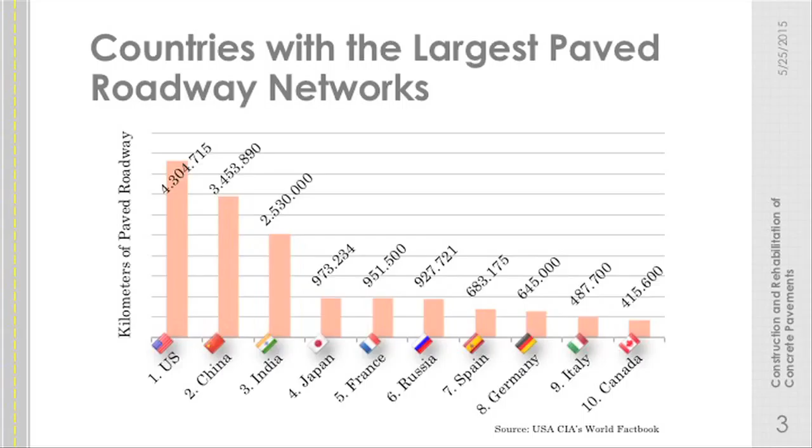My primary references for this presentation, I went directly to the source of the people that sell the equipment, because they take a lot of good pictures for publicity. So we have Wirtgen out of Germany, Gomaco out of Iowa in the United States, and Guntert & Zimmerman out of California in the United States. I've also pulled a fair amount from the internet, and I actually stole some photos from Astrid and other friends that I've made along the way that I didn't reference like Mauricio did, so I feel bad for that. I'll point that one out, though, since she's in the crowd.

Again, we saw this photo earlier. In the US, we have a very large roadway network, and every year we pave on average about 50 million square meters of concrete pavement for roads. That's not everything - that's not industrial and airfields and other spaces. That's roads. We're paving that much.

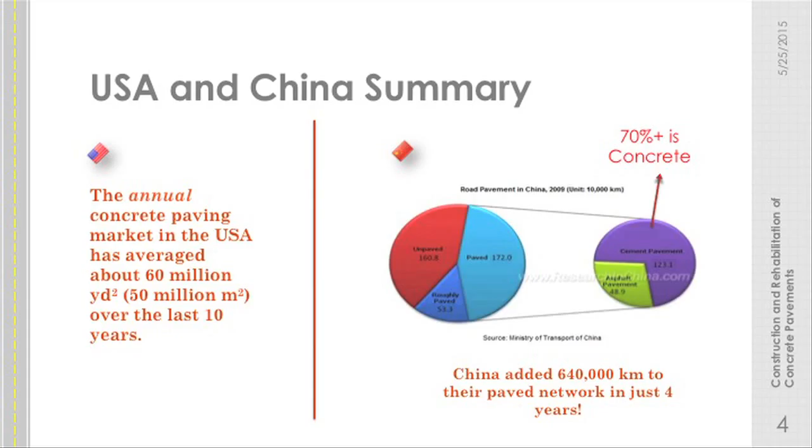Our biggest competitor, if you would call them that, with regards to roadway paving, is probably China. In the matter of 4 years, they added 640,000 lane kilometers of capacity to the roadways. And because they do so much manufacturing, they're moving a lot of raw material, they're building things, and then they're exporting the things that they built to the US and Chile and everyone else around the world.

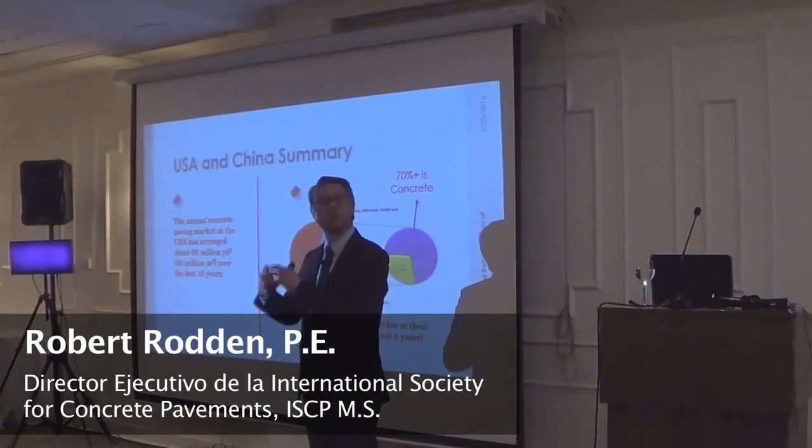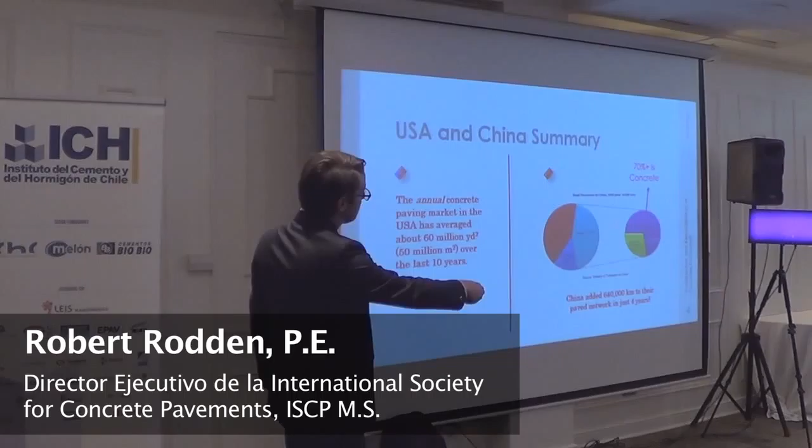They have very high truck traffic loads. In the US, our legal limit on trucks is relatively low compared to the rest of the world. In fact, most of our trucks, unless you're moving something very, very lightweight, drive around half empty. We say they scale out before they cube out - they run out of weight capacity before they fill their volume. In China, that's not the case. They fill the volume to move product, so they have very heavy traffic loads. Because of that, about 70% of their paved roadways are concrete, to fight against that and make serviceable pavements.

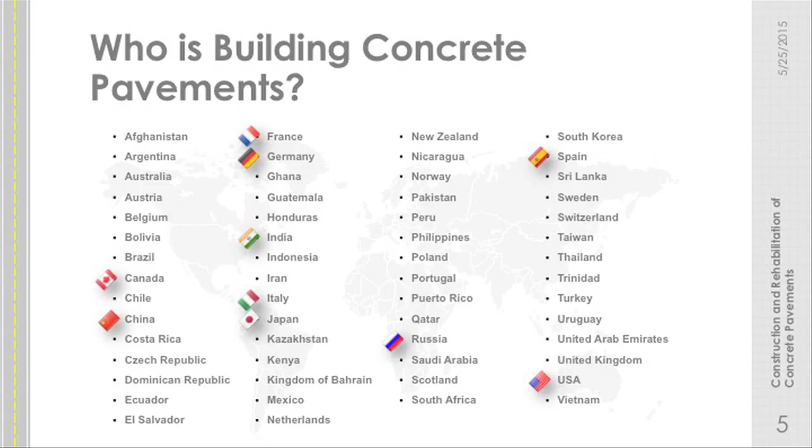So who's building concrete pavements around the world? This is the list of countries that I've worked with or am aware of that build concrete pavements in my decade within the industry. All of those top 10 that we saw are on this list. If you know of any countries that are building or have built that aren't on this list, let me know - I'd like to get them added. But all around the world, people are building concrete pavements.

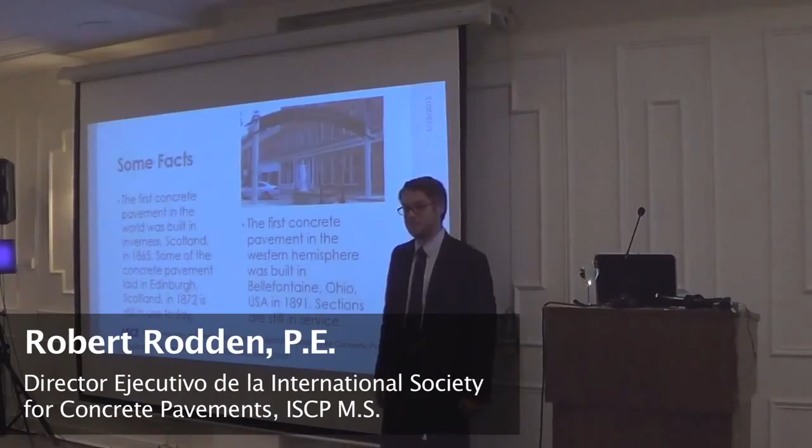The first section of concrete pavement built in the Western Hemisphere was built in Ohio. It's right here, it's still in service today. Built in 1891, it doesn't look great - it's had better days, but Ohio's a very high freeze-thaw state and they use a lot of salt on the roadways.

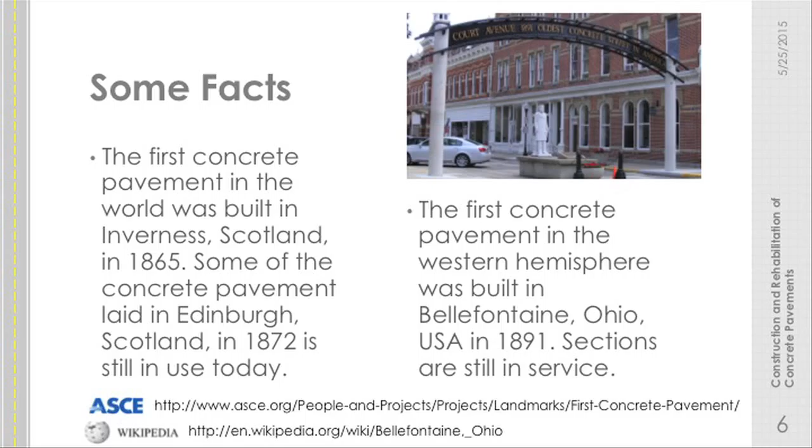There was no structural design in those days - even into the 70s, we were still kind of guessing about things. So in 1891, what they did was said, we have lumber that is this tall, we will make a square out of that. And the square's dimensions, the size of the slabs, was based just on mixer capacity - how much concrete can we make at once? Let's make it that big. That's it - no dowel bars, no tie bars, no logic about anything.

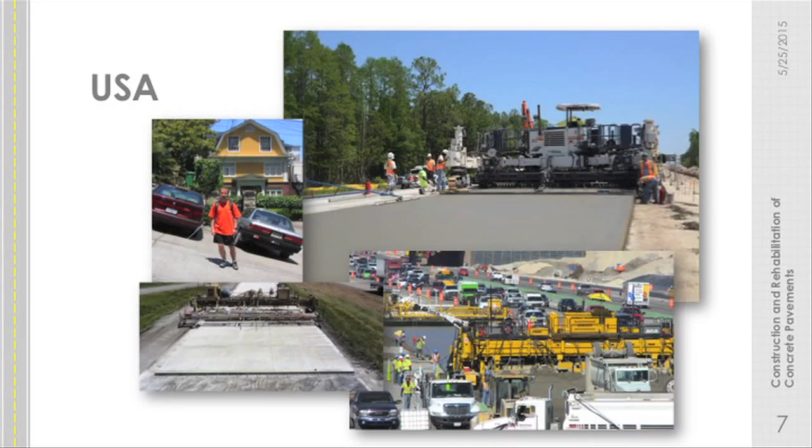Just building concrete squares. The gentleman in that photo, the statue of him, George Bartholomew, had to put a 5-year warranty on that pavement. It's still in service over 100 years later. Is there a product in the world that's been warrantied for 5 years and lasted that long? Can't imagine any other product.

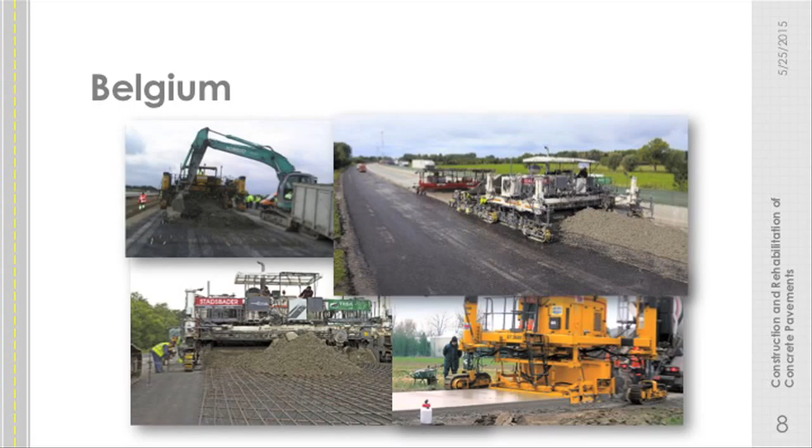So in the USA, as I've said, we build these a lot under heavy traffic, on very steep grades. That's in San Francisco. We do this thin bonded overlay in the bottom left corner - we do a lot of concrete pavement construction.

So now we'll see photos from other countries. Just to try to be brief, I won't dwell too much on them, other than to point out, I guess, more differences. Like here, they're using a loader to move the concrete in front of the paver - we would never see that in the US. I'm not sure what sort of limitation has them doing that, but they're doing that. They have dowel bars, as we use in the US. They also use continuously reinforced concrete pavements.

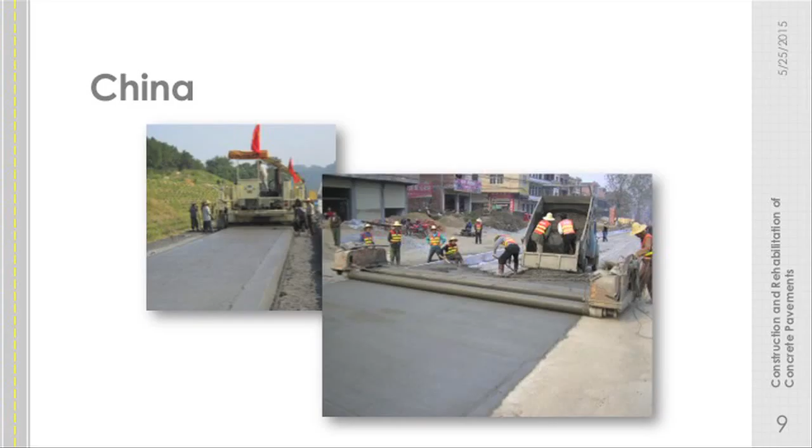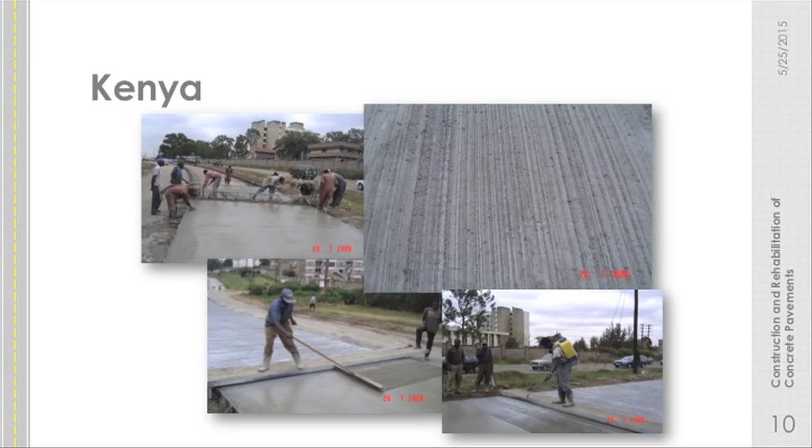In China, they're doing some fixed form paving without dowel bars. It's a double or triple tube screed. They're end-dumping right out of the back of trucks, right in front of the equipment, moving it around, leveling it off.

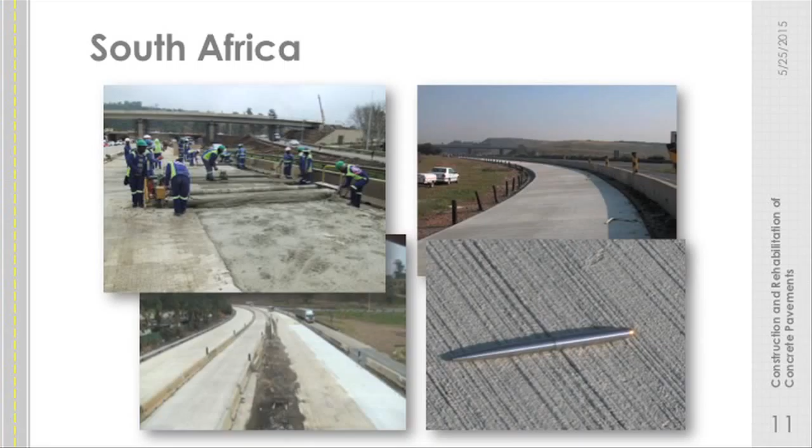Photo from Kenya. They have dowel baskets out there in front of this fixed form paving. They're using a truss screed with a broom texture on the surface - you see that all around the world - and they're hand spraying on the curing compound. They don't have a white pigmented curing compound, but they're still using one.

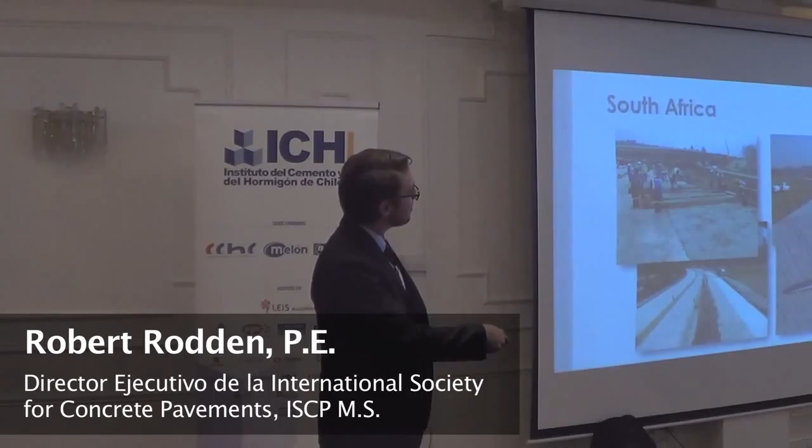South Africa. This is looking a little sloppy for what I'd like to see, but same idea. They're using almost the same piece of equipment they had in China, building very long stretches of concrete pavement in South Africa. Looks like they're also using a broom texture.

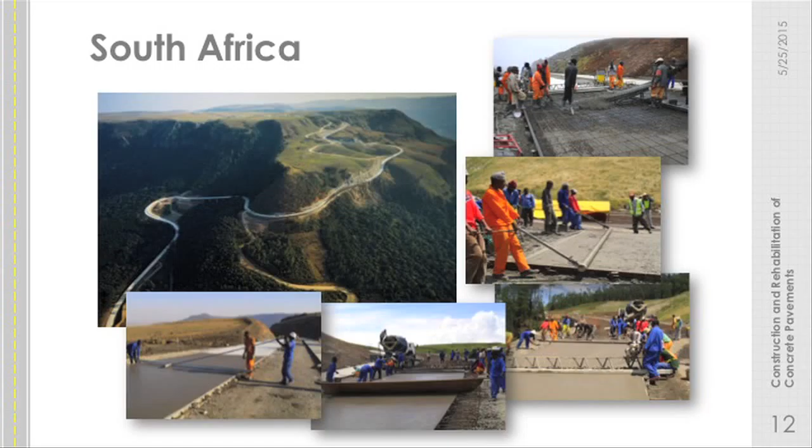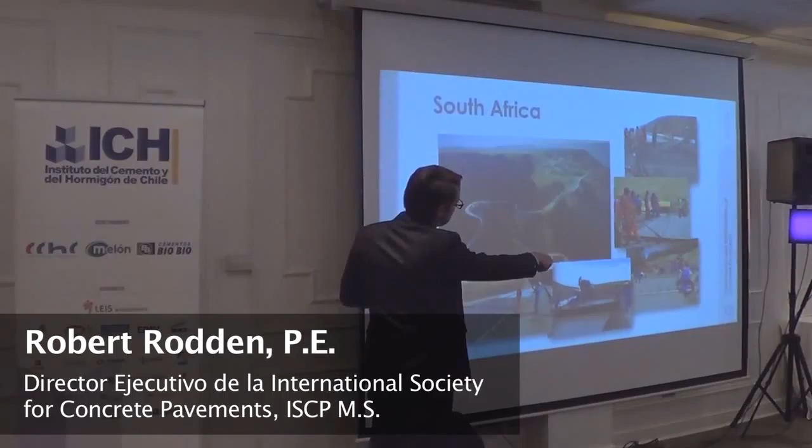Here's one project that I was told was in an eco-sensitive area. The supports for these bridges had to be constructed completely from above, with all equipment and material brought in by helicopter - very expensive. So the roadway wasn't that much of a lift for them to build in concrete, even if the price was more than asphalt. This is a large investment in the bridges there.

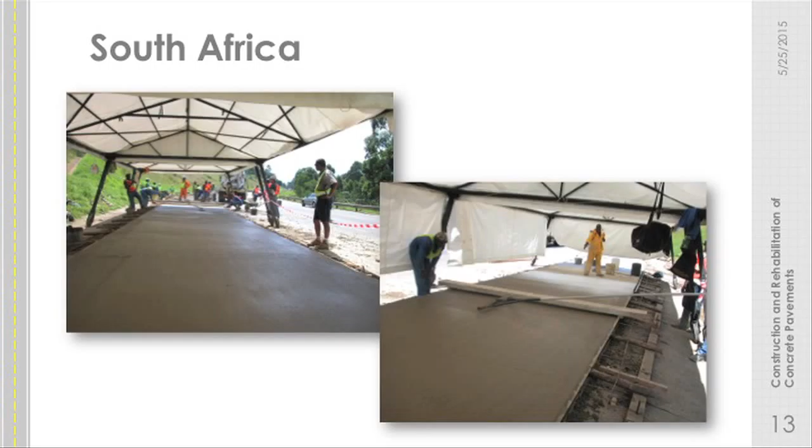So this is up in the mountains, but they're doing the same thing - fixed form, single tube, even up those slopes. They've got a truss screed following that, a burlap drag, finishing, texturing, and curing. Similar to what Mauricio showed earlier, they have tents, especially when up in the mountains where the weather can change. They have sides they can roll down to protect the work from the environment during curing time.

Some more photos from that one project in South Africa in the mountains. They do have a great document.

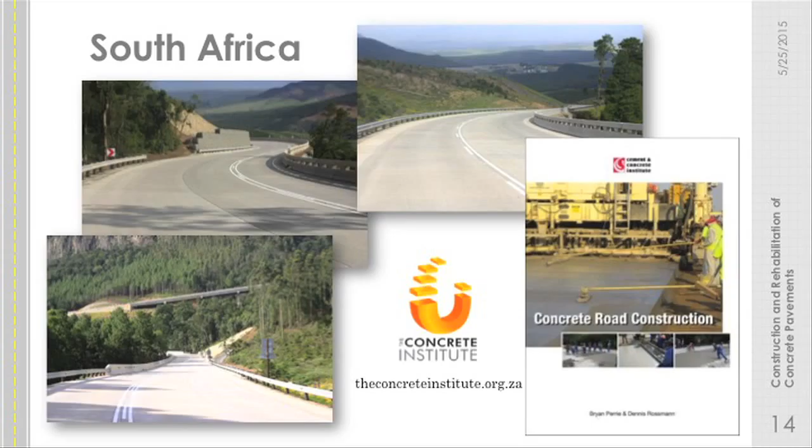Now, in the US, with so much focus on slip form paving, we don't have the best documentation of fixed form operations - I'll admit that. This document from South Africa is an exceptional guide to fixed form paving, because that's their standard. They do slip form paving, but it seems a contractor needs a large enough project to purchase the slip form paver, bring it in, and then sell it off afterwards. But fixed form paving all day - that's what they do.

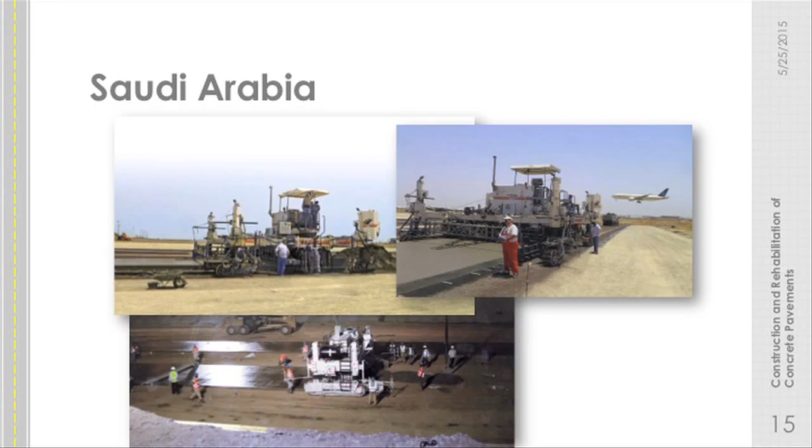Saudi Arabia, large production slip forming projects. At nighttime and during the day, we see the tie bar sticking out of the side. They have an auto float here - I guess we haven't seen that in other photos. That's another add-on piece behind the slip form paver that does the work of the person who otherwise would be using the straight edge. It just glides back and forth across the surface to help close it off more.

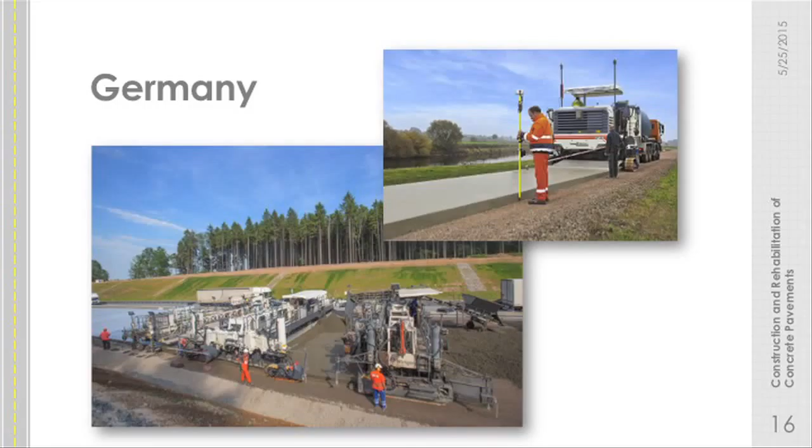Germany, the home of Wirtgen. It's like you get to look at Germany for a second while I figure out why it is we've stopped advancing again.

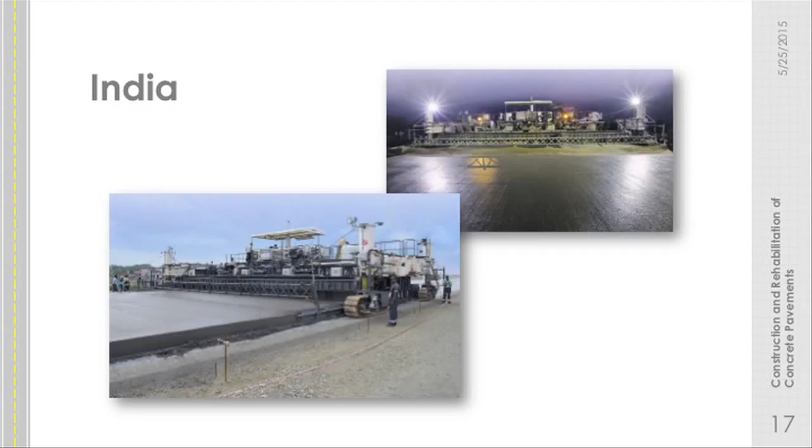Some photos from India. They do a lot of roadways. That's a pretty wide span there - you wouldn't do that with fixed form paving probably, but slip form pavers can pave that way.

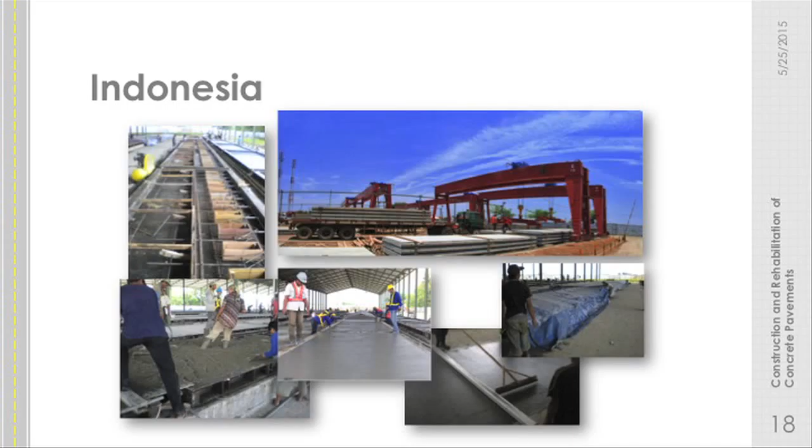Indonesia, this is one I wanted to get to. Because the price of labor is so low there, they could justify precast slabs on a massive scale. In the US, we reserve this for toll plazas and overnight closures in New York City, Chicago, and Los Angeles - places where time is really money, and the DOT or owner doesn't want any time lost, so things are very quick. For us, it's very costly because it's small scale, high unit price.

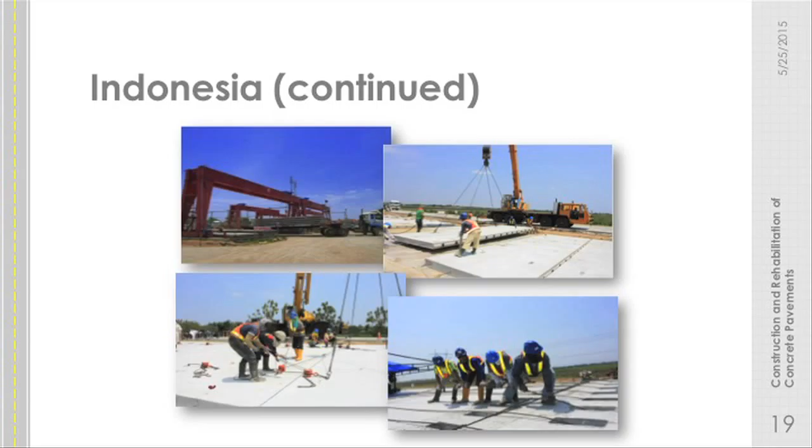In Indonesia, they built a massive farm almost, where they precast all the slabs and built up a stockyard. They did all the curing, texturing, and everything in a controlled environment, then transported these slabs out into the field and built an entire new roadway on new alignment. I believe that was directly on the subgrade, and this was precast, post-tensioned - something like 50 kilometers long in this one instance. So it can be cost justified.

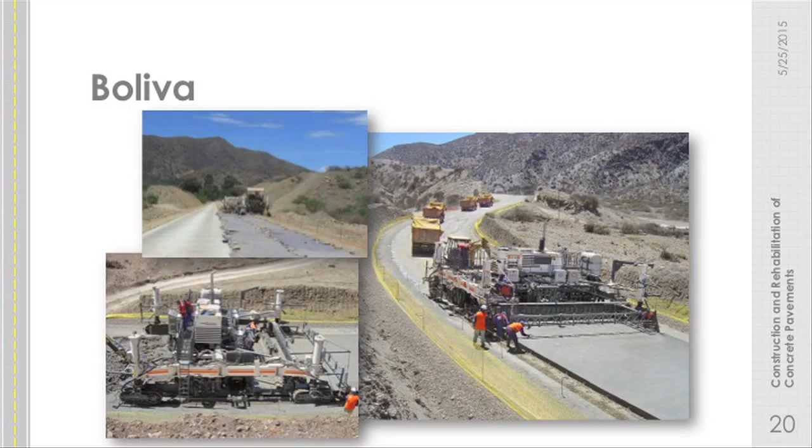Some photos from Bolivia. Here, this type of curing with a plastic sheet and rocks to weigh it down and keep it from blowing away - we would never use that in the US. We would just call that too costly.

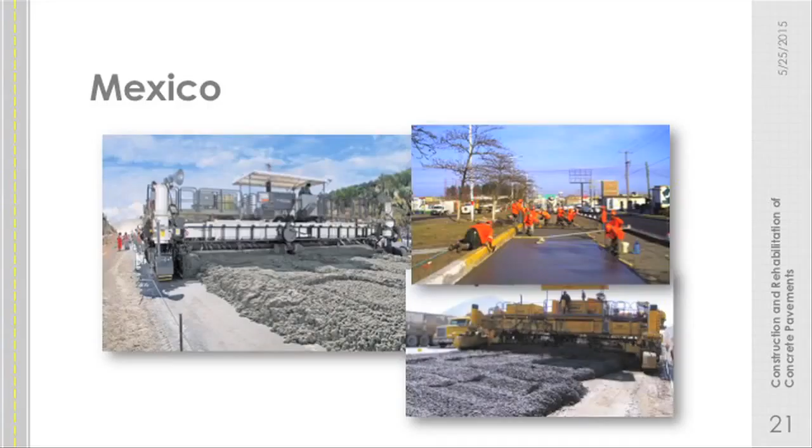Mexico, examples of fixed form paving in the city. I believe this photo, maybe the one on the bottom right, is from the reconstruction of their ring road. They did that in the last 3 or 4 years - a massive project for them - and they did that in concrete, the loop road around the city.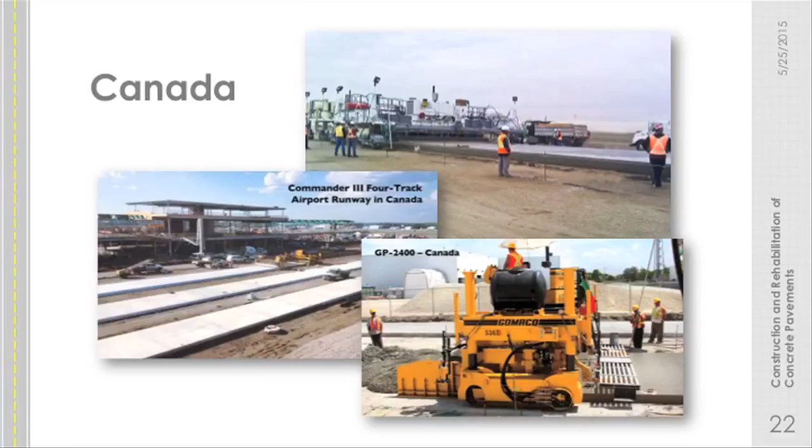Practices aren't that much different than the US, but we have our auger spinning up front, moving the concrete back and forth. It's not the quickest process, but it's pushing it into the corners. They have the tie bar inserter, the rocket launcher, on there as well.

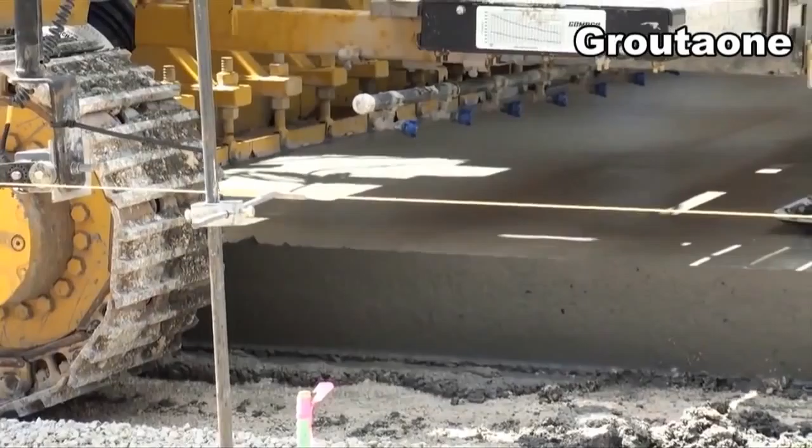In this particular instance, they had some space limitations as well, which required them to install the dowel bars during construction. Oh, you get to see the auto float in action.

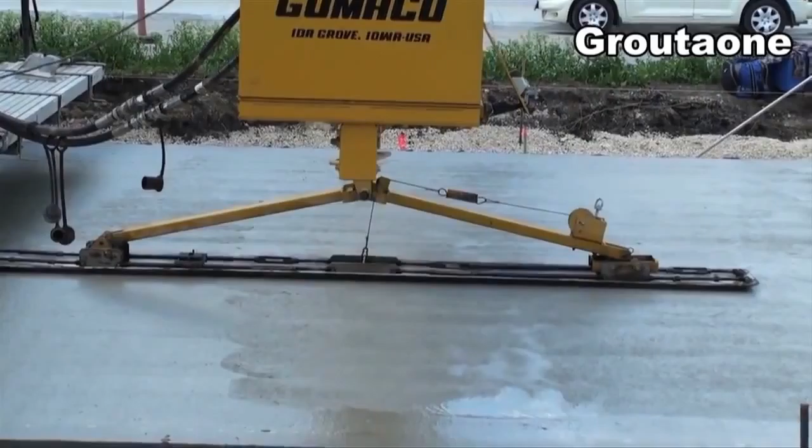So that's what I described earlier. Instead of that one person walking with the straight edge, this device goes back and forth and adds just a little bit more smoothness.

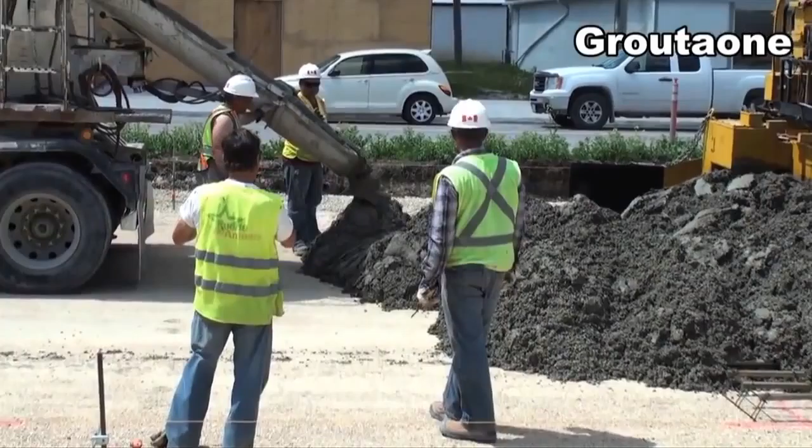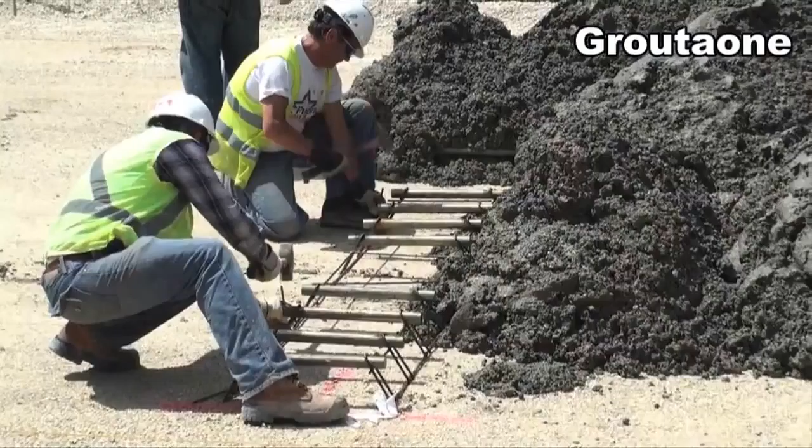So they have to deliver directly in front for some reason. On the fly, the contractors are picking up the dowel baskets and affixing them to the support. These days, we'd prefer to see that done with some of the tapered plate dowels, because they allow for some misalignment without locking the joints.

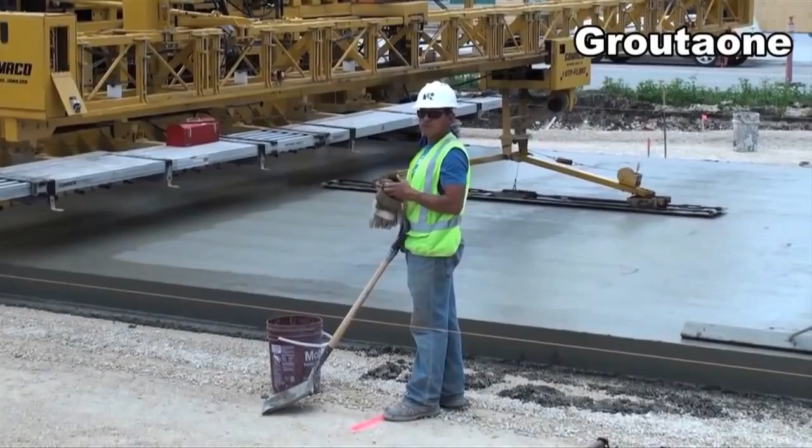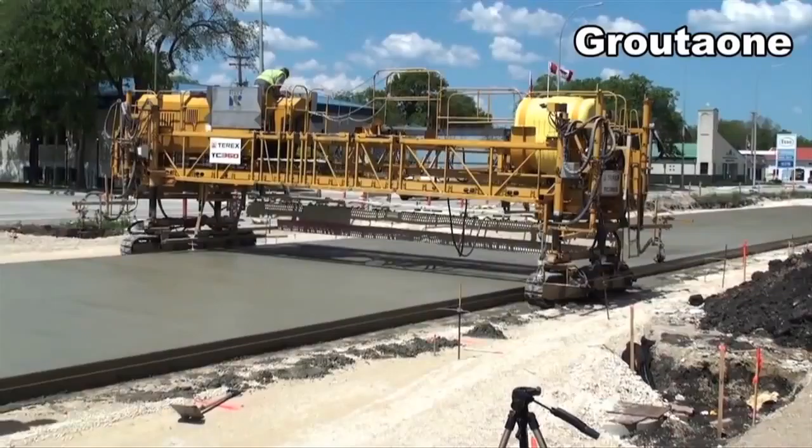Something to note on that: if the support system isn't great, which happens if you have as low of a CBR as you have, the track lines supporting the slip-form paving operation will start to settle into the support. There's a lag between that happening and the machine correcting for it - a hydraulic lag. So having strong, smooth support is very, very important for the smoothness.

Here's a texture cure machine, TC350. So that will apply - looks like they were set up for longitudinal tine. Nope, they're doing transverse. The transverse tine will stop, drop that, drag it across the surface, pick it up, move forward, and then go the opposite direction.

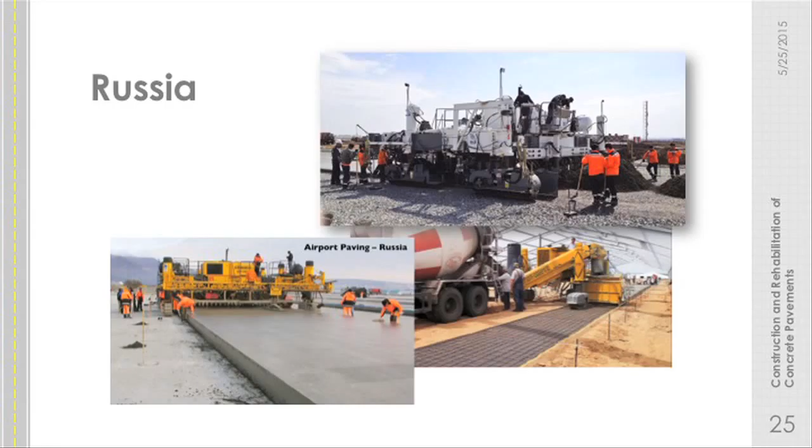And the same piece of equipment will also spray on a curing compound. So this video is really the whole process - a well-controlled, uniform process. Paving doesn't stop. That's what we're looking for.

Some more heavy equipment in Qatar. Russia.

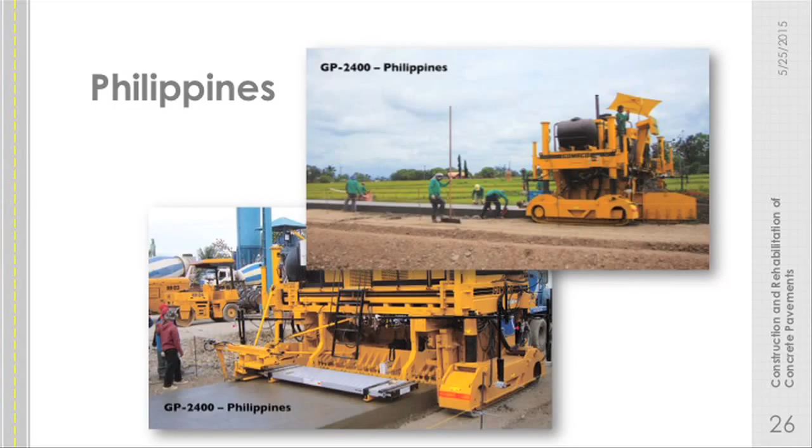It's all the same. It's white, gold, Guntert & Zimmerman; yellow, which is Gomaco; or the beigeish color, Wirtgen. But those are the three primary manufacturers, and you see the equipment everywhere you go.

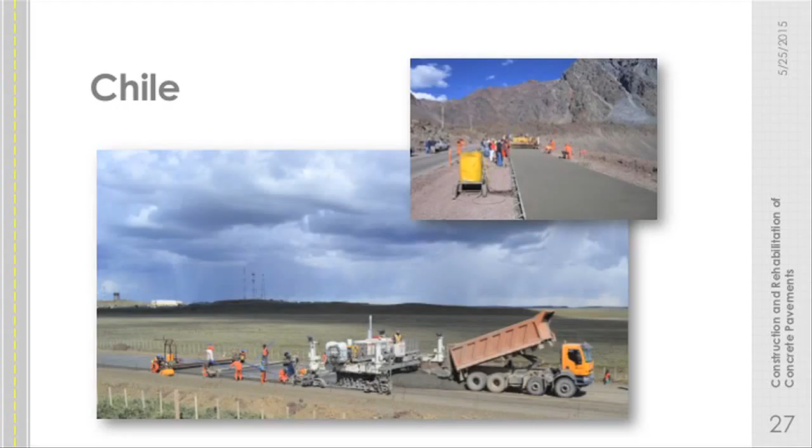In the Philippines, there they've got a little bit smaller piece of equipment. They use whatever they had available.

Here's a photo from Astrid down in Patagonia. I don't know where this photo is. It's another Chilean photo, though. Any idea where that is, Mauricio?

With the fixed form paving? But it looks like they've got some equipment riding on the forms.

This one? Yeah. What about this one? Los Andes, to Argentina. Now I know.

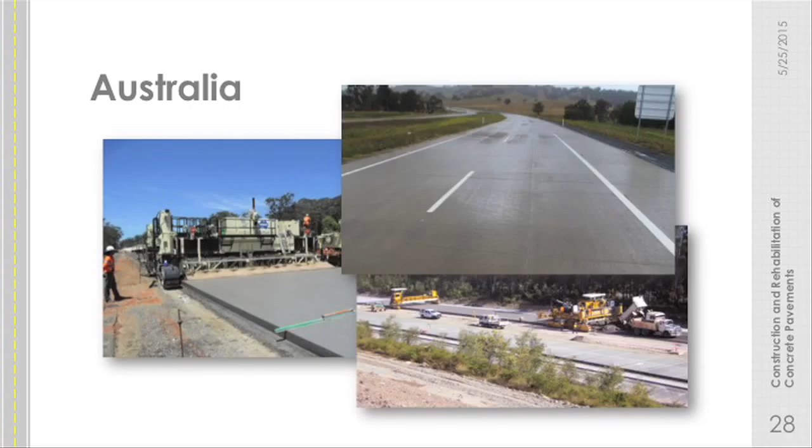I've been using that photo for years, and I have no idea where it's from. That's your road. Now I know the man who built the road, too. Another Roberto. Australia.

Here they're placing joints. I mentioned that earlier. We did that project in New Mexico where we advised that they have a longitudinal joint in the middle of the lane, and the slab width is basically from middle lane to middle lane.

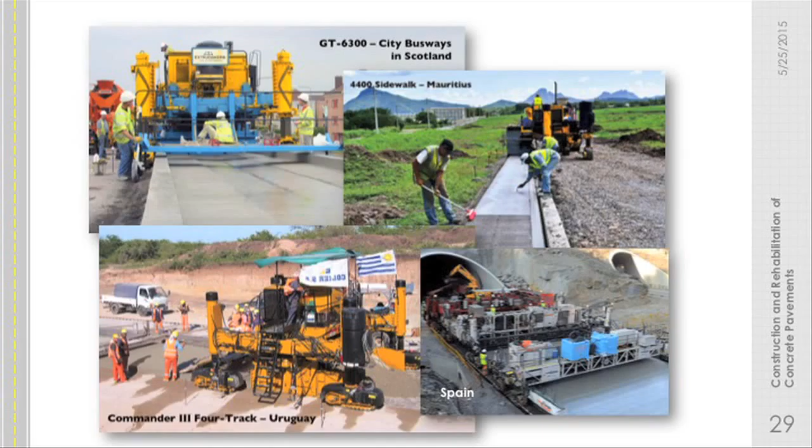Come to find out, Australia's been doing that for decades. It wasn't until I proposed writing a conference paper about it and had a discussion with a colleague on the topic that he said, 'That's nothing new, Robert, we've been doing that. Okay, send me some photos and we'll write the paper together.' So sometimes you find out your innovations aren't so innovative.

Busways in Scotland, there they've got an inverted pitch. That's a bus-only lane separate from traffic. That's also going to help with some of the drainage challenges in that local area.

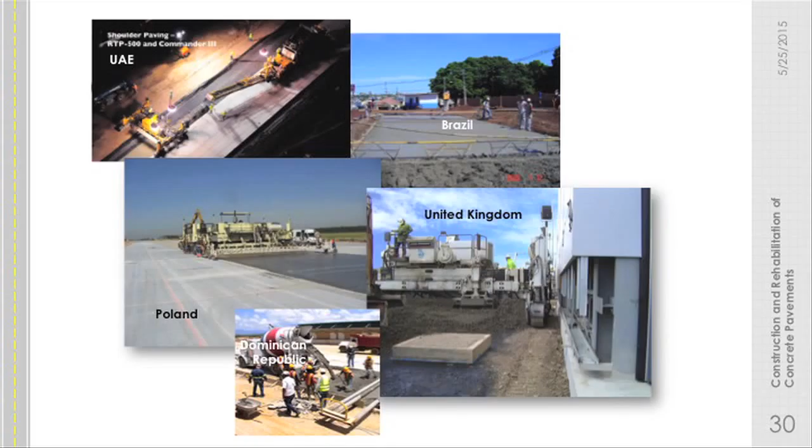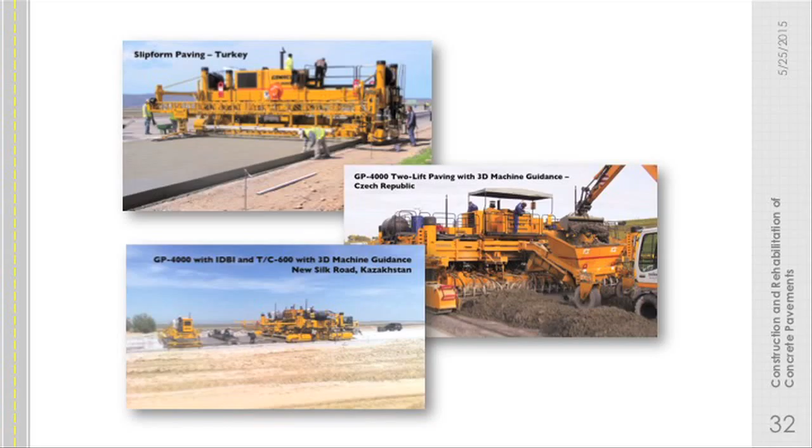Uruguay, Spain - here they're paving into a tunnel. The UAE, Brazil, Poland, the list goes on and on. But it's all the same process: we're getting fresh concrete, placing it out in the field somehow, leveling it off, applying a texture, curing it, and saw cutting it. Afghanistan, Sri Lanka, Vietnam.

In Turkey, things seem to be catching on there very quickly. I think they're doing a fair amount of roller compacted concrete now.

Czech Republic, we had a conference there this past year where we had the opportunity to go out on some of the projects that were being built in that photo. Kazakhstan.

It all starts to look the same after a while because it's the same process from place to place, and there's only so many manufacturers of equipment. We do have a pretty well-developed and honed-in method of construction at this point.

The innovation currently is happening more in the materials - especially for corrosion resistance and geometry for dowel bars, the cements and the concretes - and not so much in the construction methods. Construction methods, you're getting high volume without surprises, right? That's what you want as a contractor.